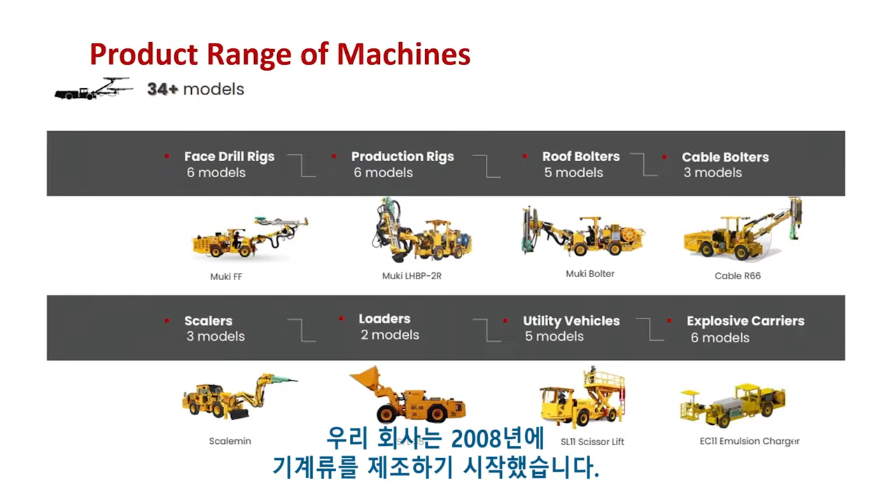Resemin is a company that manufactures heavy machinery for underground mining. We start to make machinery as about 2008. Then with the request of our customers, we start to make more kinds of machines for several uses in the mine.

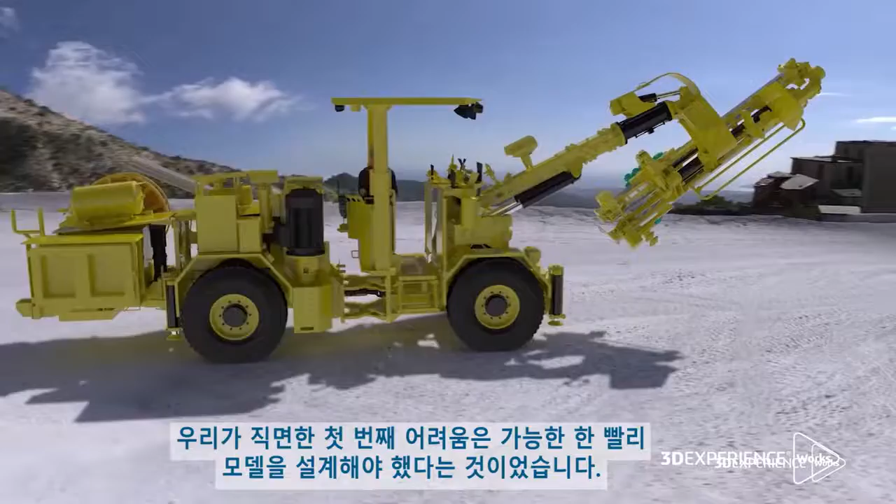We need to ensure that the operator will be safe in the cabin of our machines, and not only in the cabin. About production, we need to ensure that the equipment can make the holes as big as the company needs. Challenges: first, try to design the models as fast as we can.

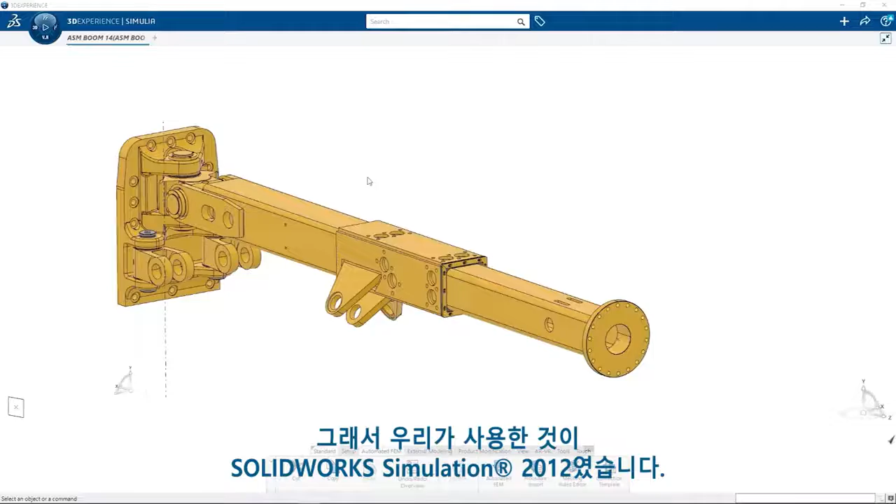With this, we need to make our analysis about the resistance of the structures in less time with more accuracy. We start to use SOLIDWORKS Simulation at 2012 because the customers ask us for some certifications, and we start to use SOLIDWORKS Simulation to make this kind of studies.

Last year I was making this same test in SOLIDWORKS Simulation Premium, and it takes about 6 hours to us. But 6 hours is too long time for our actual process.

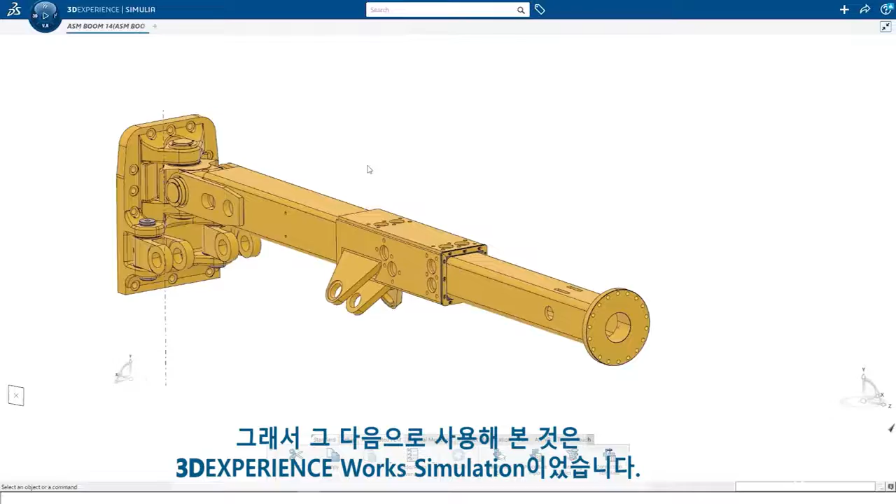We start to use 3DEXPERIENCE Works Simulation in order to reduce these times and increment the accuracy of the test. So right now it only takes us about 2 hours, and we have an accuracy of about 92 to 93 percent.

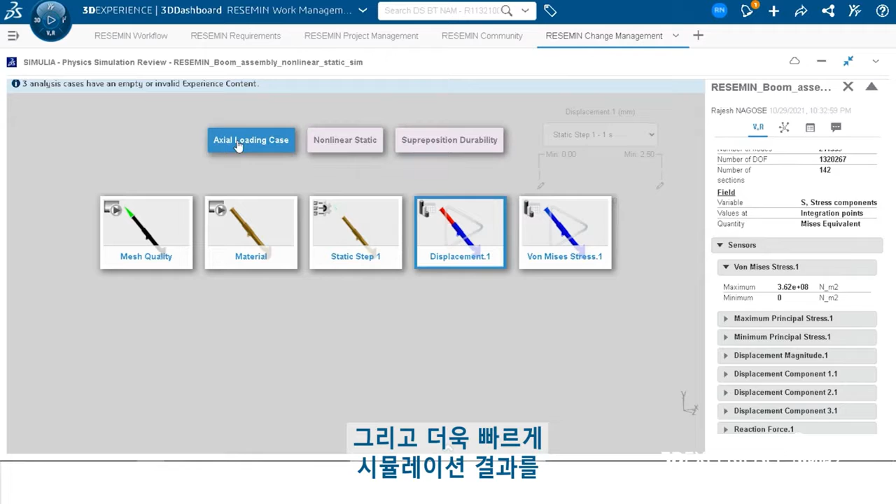With the cloud solutions, we start to communicate our results of the simulations to our manager in a better way and in less time.

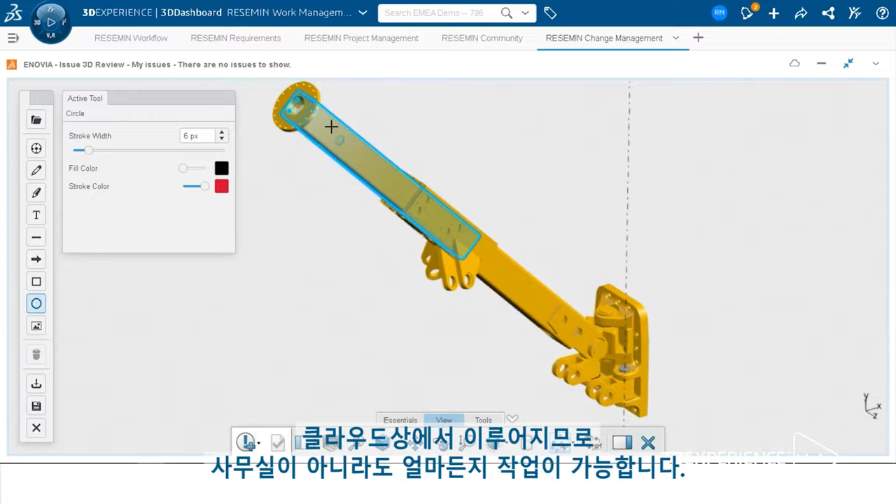With this, he can make some comments, and he doesn't need to be at the office to see the results and communicate to us the changes that we need to do. So it's about acceleration of the process.

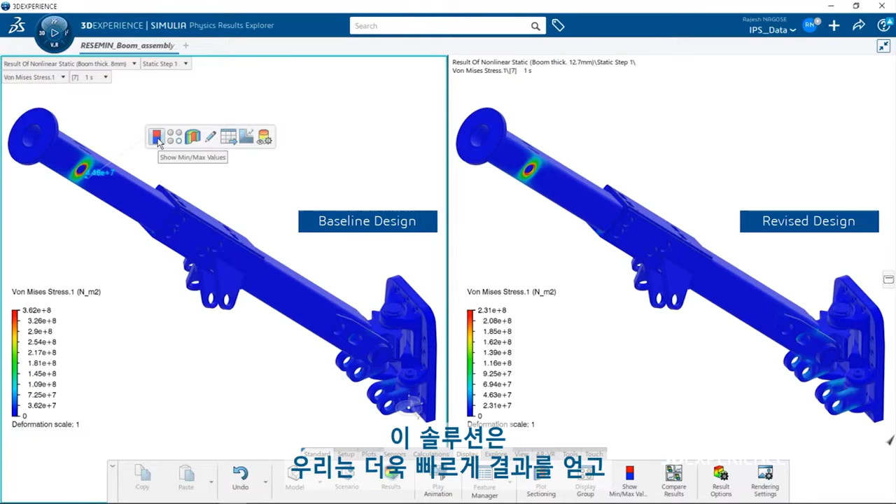The result was our clients are more satisfied with our machines. I think with the platform will help us to reach our goals, because it's giving us more velocity to get results and give to our production teams the correct information in less time.